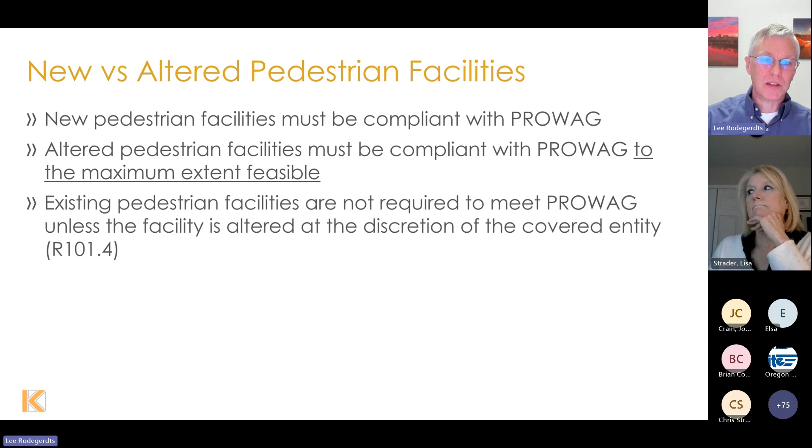What constitutes an alteration? Any portion of the pedestrian facility that's altered must be brought up to PROWAG, regardless of the scope of the alteration. So even, for example, if the main focus of the project was to add a travel lane on the roadway, in doing that, if you alter the pedestrian facilities, then you have to bring the pedestrian facilities up to PROWAG.

So it doesn't really matter if the focus of the project was not specifically to address pedestrian issues. If you alter the pedestrian facilities in the act of doing the alteration, then you would bring it up to PROWAG. That's where it gets a little gray as far as whether things trigger it or not.

It's also worth noting that altering a facility must be connected to an existing pedestrian circulation path by a pedestrian access route—an accessible route to connect the alteration to the actual project. That's something I think Lisa here can talk about as an example.

You're muted, Lisa. Everyone has to do it at least once. I have yard work going on outside somewhere in the neighborhood, so I didn't want to share the blower noise.

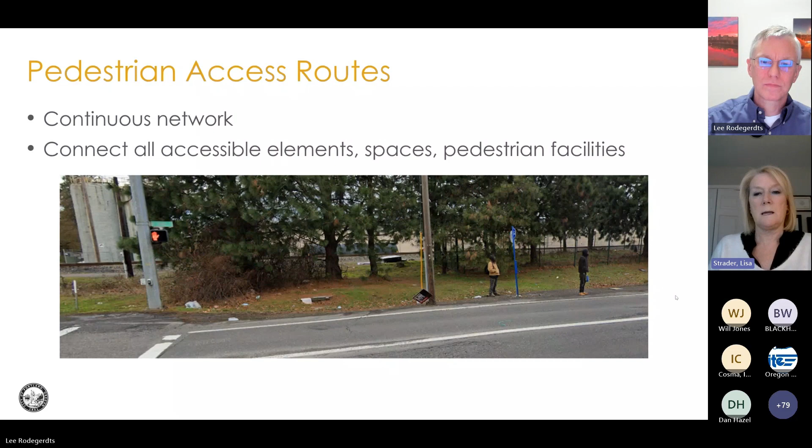So I think this part of PROWAG is going to be really helpful. It doesn't say we have to build a full-on sidewalk all the way down Sandy Boulevard here. It says we've got to have access between those two points, and that alone will make a big difference for people who need that kind of surface to get between spots.

Again, this is where it gets tricky—what constitutes an alteration? This is where PROWAG is actually silent. The draft actually listed some things that would trigger an alteration, but the final rule removed some of those things. So it is silent essentially on what constitutes an alteration, and it's a little bit left up to the interpretation of the agencies involved.

So the way I approach this, if I were asked whether PROWAG is triggered by an alteration—and again, this is nothing official from the Access Board, just my own interpretation—the question I have in mind is: does the change to the facility substantially change the pedestrian's experience? If it does, then you should upgrade the facilities to PROWAG.

Some examples of that—some are pretty obvious. If you close a crossing, for whatever reason, then you should make sure that closure of that crossing is brought up to PROWAG standards.

And this is something we'll talk about in a little bit. It's one of the new items. What if you do leading pedestrian intervals?

Now, I would argue that communicating the leading pedestrian interval needs to be done equitably to everybody, so it's not just merely doing a signal timing change. It needs to be communicated to all pedestrians equally. That's where the APS comes into play, to communicate the start of the walk interval, because it's not at the same time as the start of motor vehicle travel. And so that's where the cues are different, and that's where the APS provides information that would otherwise not be given to somebody who is blind or has low vision, where they would normally hear the sound of the vehicles next to them starting and recognize that as being the start of the walk interval.

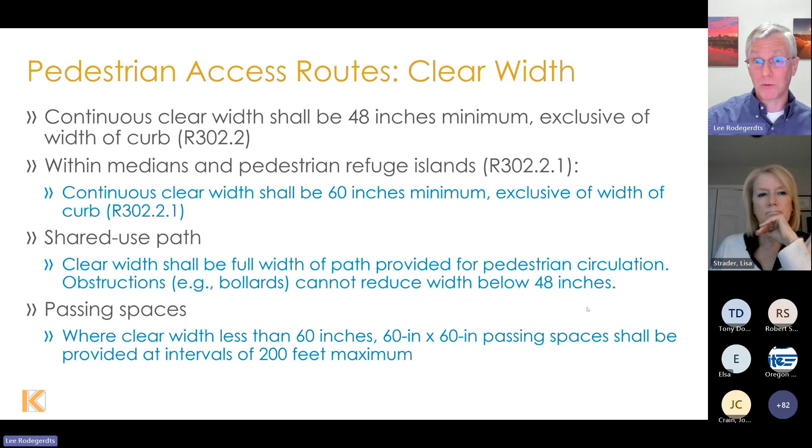Lee, this is Lisa. There's a question in the chat, and we didn't really talk about whether we wanted to take those live or wait. You want me to read it to you? Yeah, feel free, I can't read the chat. Yeah, I know it's hard sometimes. So this is - you mentioned adding bike lanes - is a road diet going to require PROWAG? And I'm not sure whether that whole question got typed or not.

So yeah, Peter, if you want to. I would argue that if you're changing the pedestrian experience, then you should bring it up to PROWAG standards. So again, if part of the road diet is altering the pedestrian facilities, if part of the reason for the road diet is to be able to widen the pedestrian facilities or add buffers or other things between the pedestrians and bicyclists or things like that, in my opinion, I think that would trigger PROWAG. I don't know if you have an additional take on that.

No, this is Lisa. I actually hadn't thought that one through yet. So I would like to think that it does. I would like to think that whenever we can, we lean into this new guidance that was specifically designed and developed by and for people with disabilities. I think that's going to make it a much more universally usable transportation system. But I think for at least for PBOT, that's probably a question yet to be answered.

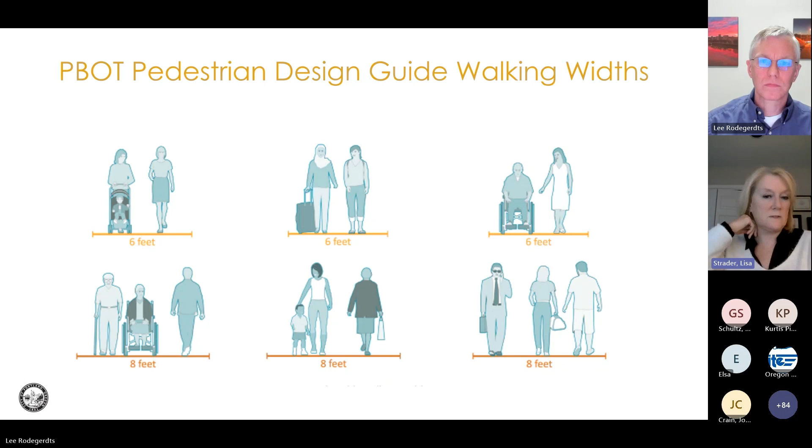From our PED design guide, we provide specific width guidance related to the different street design classifications. In every case, we exceed what PROWAG is requiring now.

Question in the chat: how does the 48-inch minimum width PAR apply to obstructions like utility and signal poles? I'm not sure we covered obstructions in our presentation, and off the top of my head I don't know what PROWAG says about those. I don't want to misspeak about whether 48 is the absolute minimum or if you can drop to 36 for an obstruction—I don't know that for a fact, so I'd have to look that one up.

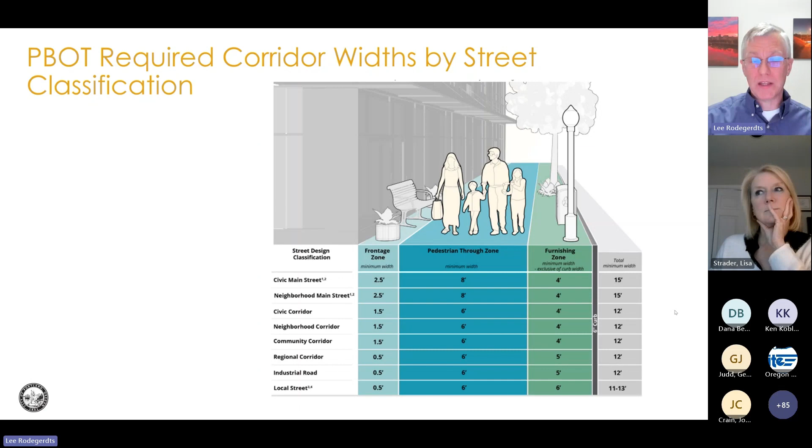Within the pedestrian access route's grades, in the direction of pedestrian travel, there's basically a maximum grade. However, if the street itself is steep, the pedestrian access route can share the grade of the street—you do not have to flatten the street itself. If the entire street is on an 8% grade, that's acceptable, because that's one of those practical limitations PROWAG recognizes. Otherwise, 5% is the maximum grade.

Within crosswalks, it's similar: you can match the street grade, but you can't make it steeper. If the street grades are steeper than that, you can match them. Similarly, if the street is super elevated—more of a state highway issue than local streets—at a super elevation greater than 5%, you can match the super elevation if that's the grade in the direction of pedestrian travel.

The cross slope, perpendicular to the direction of travel, is really critical for people in wheelchairs. This is the rationale behind why cross slopes are so important: so a person in a wheelchair can maintain their alignment through the crossing. If the cross slope is too steep, it will pull them in the direction of the cross slope. That's why there's a 2.1% maximum, which is mathematically close to, but not exactly, a 1:48 slope. PROWAG actually clarified that to allow for construction tolerance—2.1% if measured that way, as opposed to the exact number of 2.08.

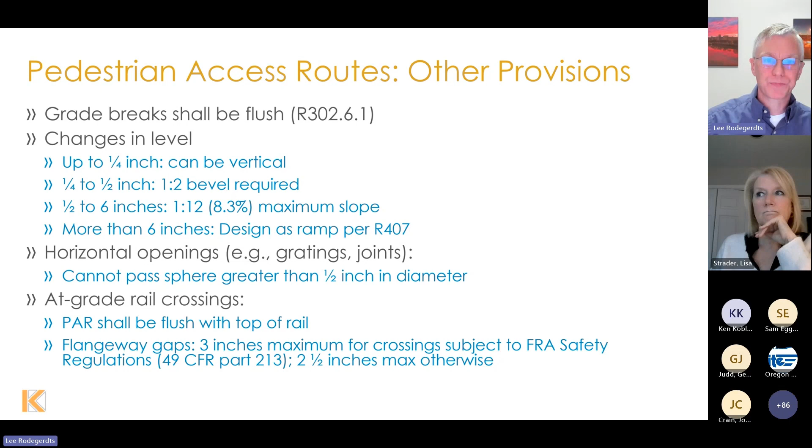Thank you again, Lee. So as it relates to sidewalks and pedestrian access routes, just pointing out that the city of Portland, like many jurisdictions, has a city code that puts those responsibilities on abutting land owners, abutting property owners.

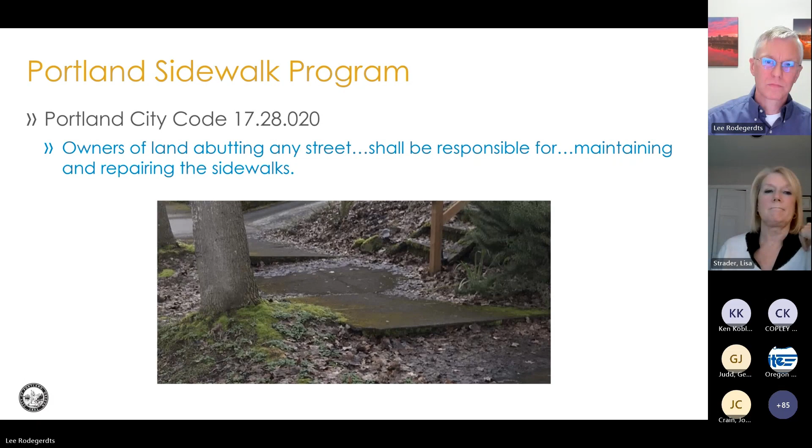As it relates to PROWAG and any measurements that change what makes a sidewalk compliant, I'm sure we will look at changing how we evaluate sidewalks we have reports on related to PROWAG, and likely have those be the ones out of compliance. Again, we haven't had that conversation throughout the Bureau—we've just started our conversations on that, but I'd guess that's how we will include it in our sidewalk enforcement program. Thanks.

Now I want to talk a little bit about alternate pedestrian access routes. So these would be those in construction zones. Basically, if the existing route is accessible, you have to maintain the route during construction.

What's new here is that not only do you have to sign it to meet the visual requirements within PROWAG, but there also needs to be an audible component. This is new in the final rule and wasn't part of the draft. You need to communicate verbally so someone can get this information if they cannot read the sign themselves.

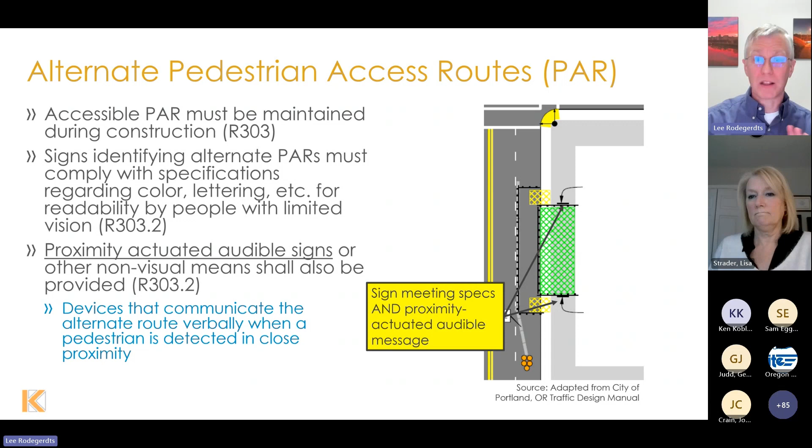So if somebody is blind, they need to be able to get the same information that the sign is providing. That's a new provision that we'll talk about a little bit later, the practical implications of that.

Similarly, the route has to have the 48 inches. I touched on some of these already. You'd still need passing areas every 200 feet, just like a normal pedestrian access route. Where you cross a curb, you need to provide a curb ramp or a blended transition that meets those requirements.

Channelizing devices need continuous detectable edging so you can pick it up by cane, not just at shoulder or waist level or 36 inches high. You have to be able to pick it up at a lower level as well. And if pedestrian signals are part of the temporary route, they need to also be accessible - accessible pedestrian signals, or APSs.

A lot of these things are already part of many design practices, because many of these components were in the draft. That said, there may still be some nuances in the new rule that affect our construction traffic control practices.

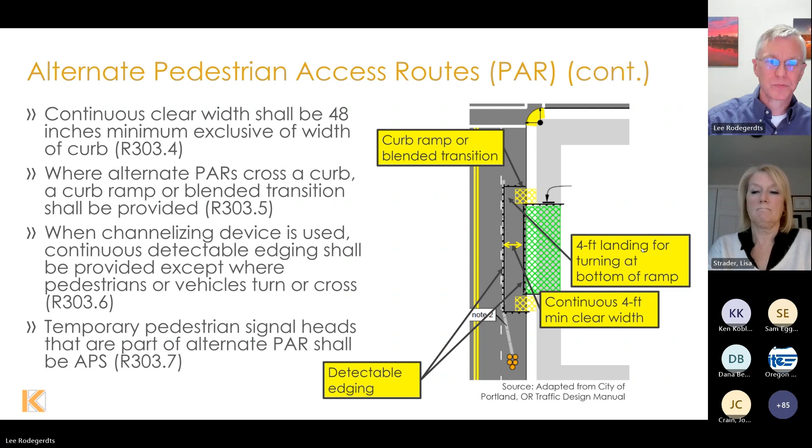Again, this isn't specifically how the city of Portland is going to adopt or address the PROWAG changes to temporary pedestrian access routes, but an opportunity to talk about what I hear from people who cannot get around when we interrupt what used to be there, whether it's for a road project or other building projects.

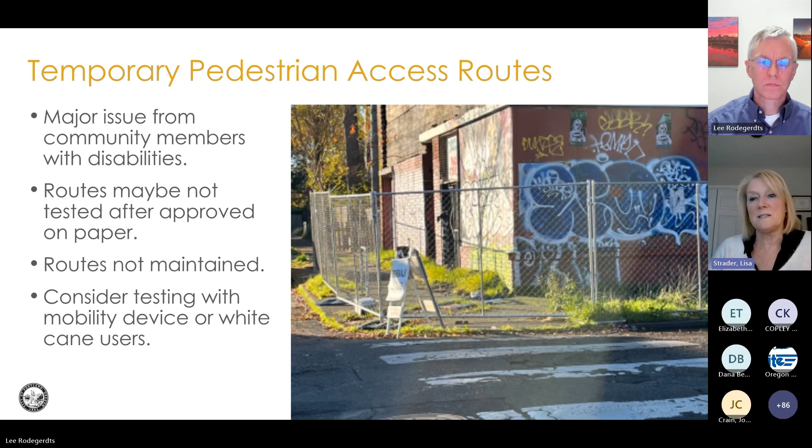If they're not properly installed, maintained, or moved when needed - a lot of projects, especially road projects, have phases. Getting phase 1 right, if you don't adjust for phases 2 and 3, isn't really helpful long-term for people who need to get around while we do our work. So thanks.

Let's talk about curb ramps. They are required for each pedestrian crossing, and detectable warning surfaces are required at the base of the ramp. Nothing new there. If existing constraints make it infeasible to provide separate curb ramps for each pedestrian crossing, you can use a single curb ramp at the corner, but that's the exception, not the rule.

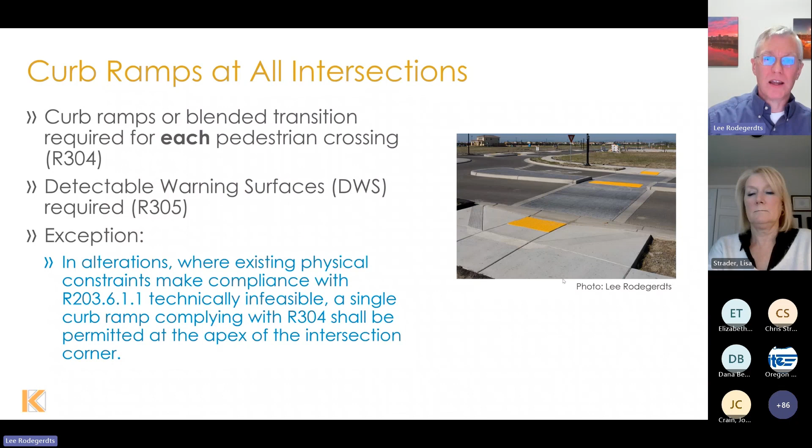We're working toward having individual curb ramps dedicated to each pedestrian crossing, because that works so much better for people who have mobility disabilities or who are blind or have low vision. It's very difficult for a person who is blind to use a single curb ramp on the corner and realize it's serving both pedestrian crossings. That's why it's desirable to have them separated this way.

When you provide ramps, you need to provide a landing area so that someone in a wheeled device can position themselves above the slope, rotate to match the slope, and go down perpendicular to it. This is really critical for people with mobility devices. For example, with a typical perpendicular ramp, you need the landing area behind the ramp, because otherwise the cross slopes become too steep.

That's where those cross slope requirements I mentioned earlier come into play—tops of perpendicular ramps or bottoms of parallel ramps. If you lower the entire ramp because you can't fit a perpendicular ramp, which is very common, then the landing area is assumed at the bottom of the ramp. This ramp here is an older one that doesn't have a landing or detectable warning surface, and we still have plenty of these around our communities.

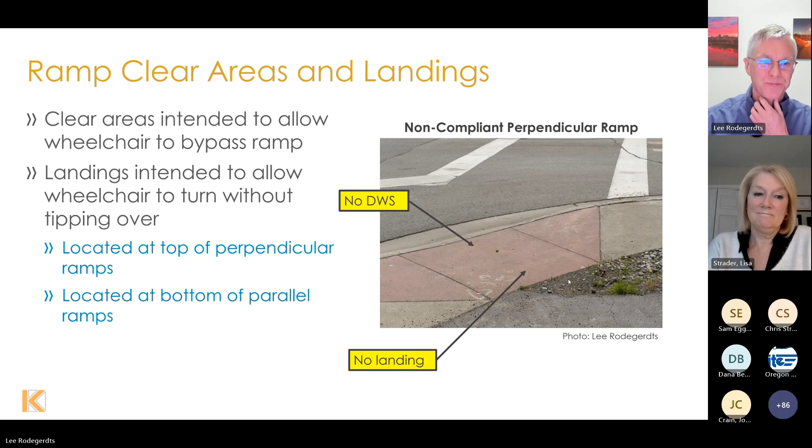These landing areas need to be 4 feet by 4 feet. I kind of think of them as a 4-foot circle, but PROWAG specifies it as a 4 foot by 4 foot square. The cross slope within that square needs to be, again, 1 in 48 or 2.1%.

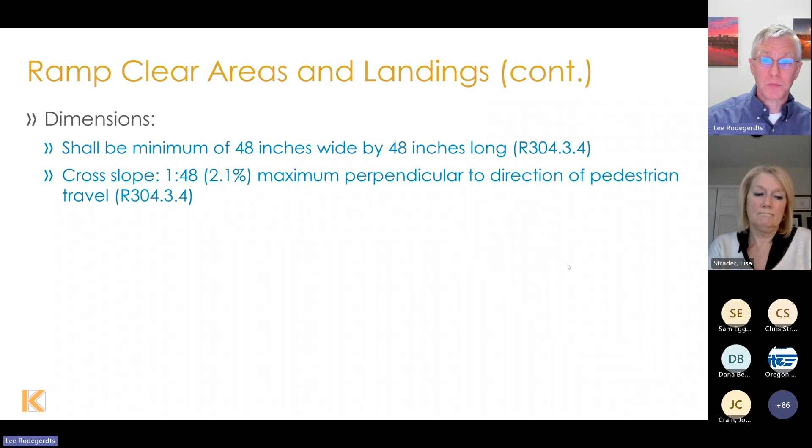Ramp widths need to be 48 inches minimum for a typical curb ramp. If it's shared use, though, they need to match the width of the shared use path. So if you bring in a 10-foot wide shared use path into a curb ramp, you can't put a 48-inch wide curb ramp at the base—it needs to be widened to match the width of the entire shared use path.

That was part of the supplemental draft to PROWAG that came out specific to shared use paths. There's nothing new in this from the draft to the final, but it was part of the supplemental draft that came out a year or two later after the original draft.

What this means, for example, at roundabouts, where it's been fairly common practice up to this point to use shared use paths around the perimeter—and we could talk further about that if we have time—those shared use paths' ramps need to match the width of the shared use path, which requires wider ramps.

This is Lisa again. PBOT is operating under a consent decree, so we have language in that court-approved document that talks about us using the 2010 ADA standards to build curb ramps that meet the requirements of that agreement. This is another one of those places where we have to talk through whether or not PROWAG will supersede that, especially because it doesn't become official guidance for some time.

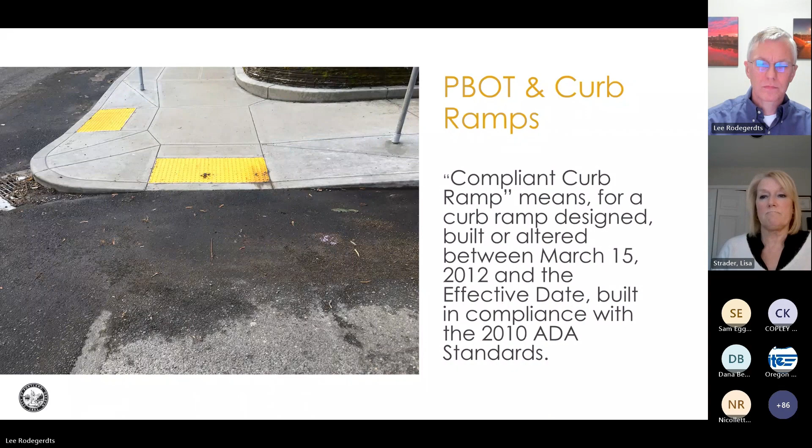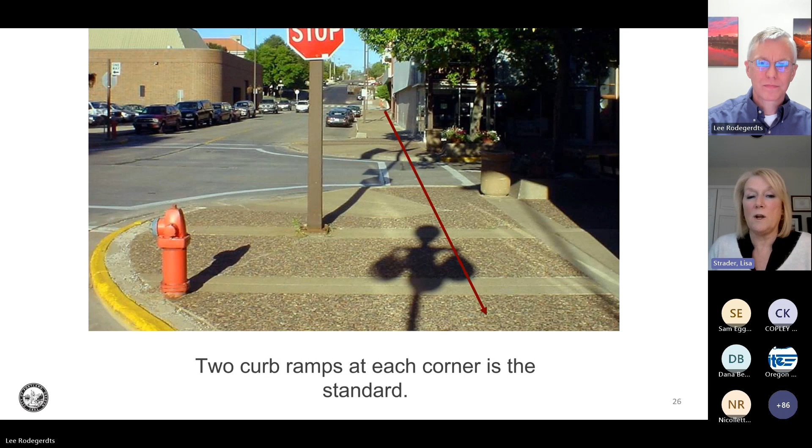I can step down one curb and back up on the other. My friend who's using their wheelchair has to take a different route to head to lunch with me. It's longer, and it puts them into the path of vehicles a lot longer than it puts me. They're likely a lot lower profile than I am, and so maybe less visible.

They're walking with someone in this example, so maybe a driver will notice at least the person walking upright and not miss the fact that there's somebody in their path of travel. But if they were by themselves, or even if it's a dark, gray, rainy day, that puts that person at more risk in vehicle traffic than is necessary—risk that 2 curb ramps would help prevent.

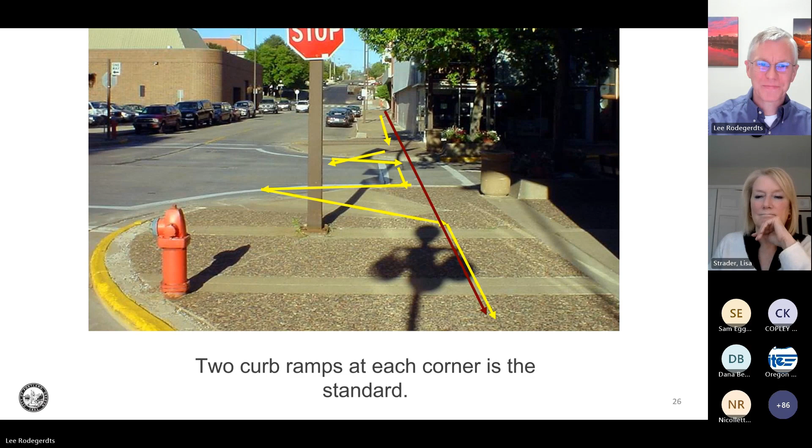To continue on crosswalks, one requirement that's been part of roundabout design for over 20 years now is providing a back buffer between the crossings next to the circulatory roadway. So anywhere at the intersection where pedestrian crossing is not intended or is prohibited, you would provide this buffer.

In PROWAG, it was specified as either landscaping, or what they've added here is this other non-prepared surface. That's undefined within PROWAG right now. The language says they're going to provide further guidance on this in the future, but at the moment it's undefined what a non-prepared surface is.

My interpretation has always been that a non-prepared surface would be something like landscaping or gravel or other loose surfaces, or otherwise not a comfortable walking surface - so a really rough cobblestone. A smooth cobblestone could be a walking surface. Brick certainly is a walking surface. Stamped or painted concrete certainly is a walking surface. Asphalt's a walking surface, so it's clearly not those. It's really something distinctly different from what would be considered a normal walking surface. That's my interpretation, but again, PROWAG is a little undefined right now on what specifically non-prepared means.

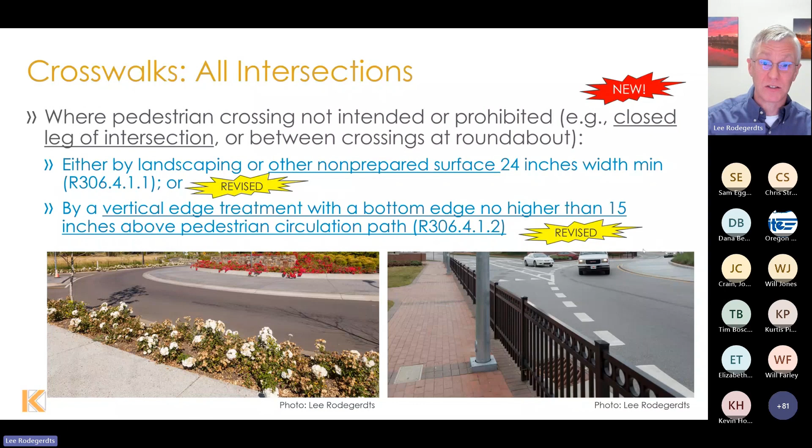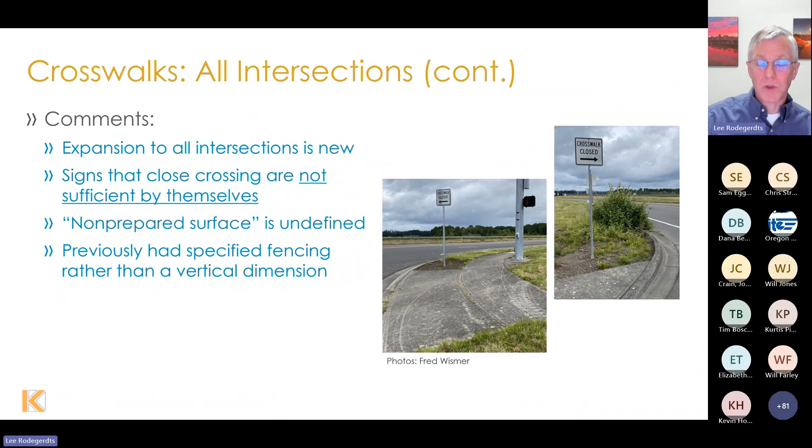So what this means is that simply signing it closed is not sufficient, and that's a really big deal. We have plenty of these kinds of intersections around where we have crosswalks that are closed, so how to communicate that in an accessible way is a really important part.

This is a sign that PBOT actually doesn't use anymore - it's like an upside down coat hanger to close a crossing, and white cane users talk about how easy it is to miss that one pole. We now use something more like a staple with a bar across the bottom that's much more detectable.

But even so, even our new ones aren't what people who are blind or low vision would call fully accessible. It doesn't tell them where to go - it says there's a barrier here, but doesn't give guidance on how to find the accessible route. I don't know that PROWAG specifically identifies that, though some of the language Lee highlighted leans into saying don't just put up a barrier, but give guidance on where the route is. That's something I know people would like designers to be aware of: just telling them they can't cross here might keep them safe, but it doesn't necessarily get them to where they need to go. If they still need to get to the other side of the street, giving them guidance on how they can safely do that needs to be part of how we close an area.

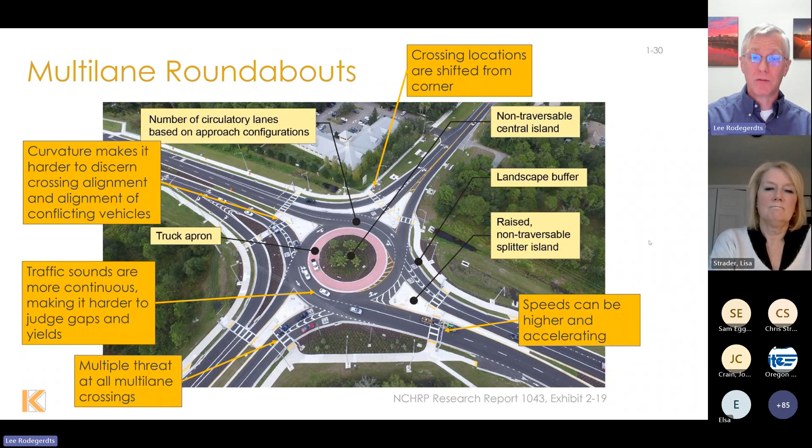Now, all of those things happen at any roundabout. Some single lane roundabouts, this becomes really challenging for people who are blind, but other single lane roundabouts it's fine. But multi-lane roundabouts introduce the next layer of challenge, which is the multiple threat. And that, when combined with the other things, makes a multi-lane roundabout especially difficult for somebody to cross who is blind or has low vision. So that's where a lot of the motivation behind the requirements for multi-lane roundabouts has come about.

With that, the draft specified you have to have a traffic control signal with a pedestrian head, basically a red indication. The final rule expanded this requirement to cover some additional items. So it not only covers a pedestrian signal, but also includes a pedestrian hybrid beacon, or PHB. It includes the rectangular rapid flashing beacon, the RRFB. It also includes a raised crosswalk, or some combination thereof. You could combine, for example, an RRFB and a raised crosswalk, and that would be fine. But it has to be from that list to make the crossing accessible.

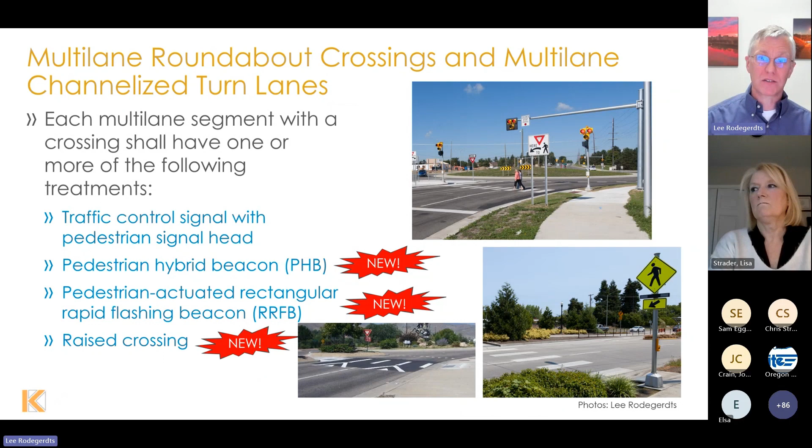The PROWAG is silent on which one to use, and that's something I'll talk about a little bit later. There is research on how to do that selection process. The research first helped to document the problem and expanded the range of solutions. So it's nice to see that the research that's happened over the past decade has informed the final rule, which is very good. It's gratifying to see that.

It's silent on single lane crossings. That doesn't mean all single lane roundabouts are okay. Some single lane roundabouts, just like some single lane channelized right turn lanes, could have accessibility challenges, and the guidance in NCHRP report 834 can be used to help define whether that's going to be a problem or not. So you could make that assessment if you'd like for the single lane roundabout or single lane channelized turn lane. But PROWAG specifically applies only to the multi-lane roundabout crossing and the multi-lane channelized turn lane.

Anything you wanted to add to this information, Lisa? So Lee, with your work with blind and low vision community members, I think you covered everything that I would have said about the challenge that I hear from people, especially blind and low vision community members, with roundabouts. So no, thanks. Okay.

Continuing at the intersection, pedestrian signals, all new and altered pedestrian signal heads need to also have APS, which of course is at the button. The APS has not only the audible communication, but also vibrotactile. So it's providing not only for people who are blind or have low vision, but also who have auditory difficulties. And you can use it for alignment.

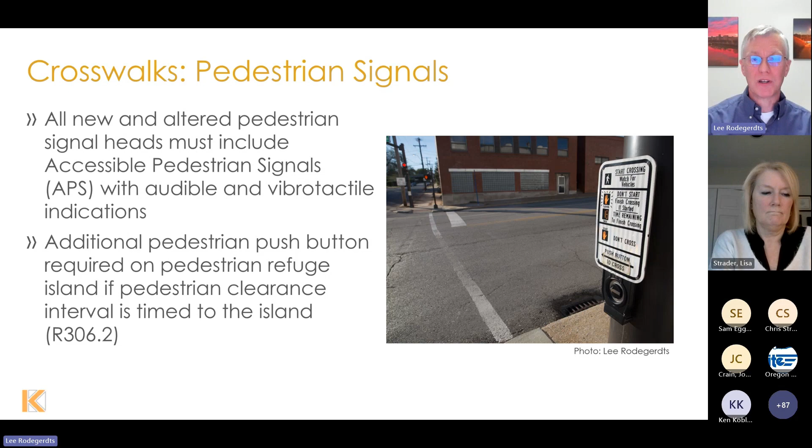So again, that's, and you would require an additional push button if the pedestrian clearance interval to cross the intersection is only designed to get you halfway across. Then you would need an additional accessible push button out there in the median.

A new provision in the final rule—I want to give a hat tip to Peter Koonce at the City of Portland, who pointed this out on the ITE traffic listserv. I started thinking about this and scratching my head, and realized this is a big deal.

When the signal is operating in flashing mode, PROWAG requires that the locator tone remain active and that there's a speech message indicating the signal is in flash. But from a practical standpoint, the way our APSs are currently used, they're taking power from the pedestrian signals and are required to go dark during flashing operations. So there's no power at the APS to communicate with, nor does the APS know which mode the signal is in, because it could be in a planned flash from the controller, or an unplanned flash from the cabinet due to a malfunction.

So these are important technical details that still need to be sorted out. This is where the MUTCD language and PROWAG come into play, and how these will pair together—but it's more than that. It's how our NEMA standards for signal controllers and cabinet standards, how all this actually gets assembled in our controller cabinets to make this provision active.

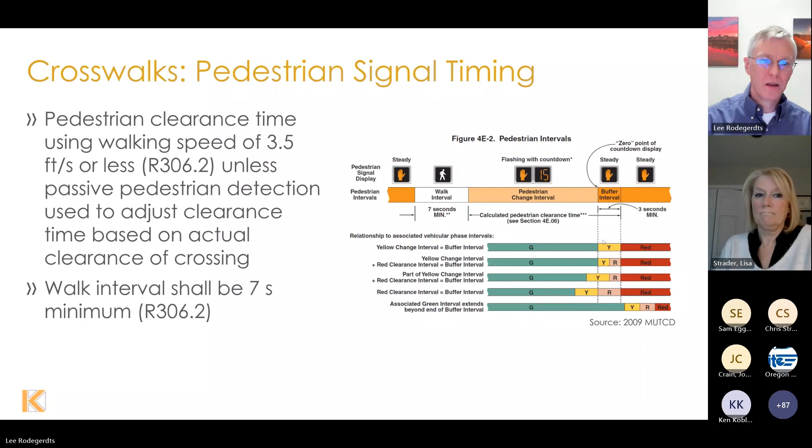I also want to shout out to Peter and his team for my experience with them, and the handoff I do of community members who need longer signal times as an example, and how well the PBOT signal and street lighting staff work with them to make those locations safer—regardless of whether we can make major infrastructure changes or do what PROWAG requires right away. We still do our best to get them around the areas they need to in the safest way possible, with adjustments to what's already there.

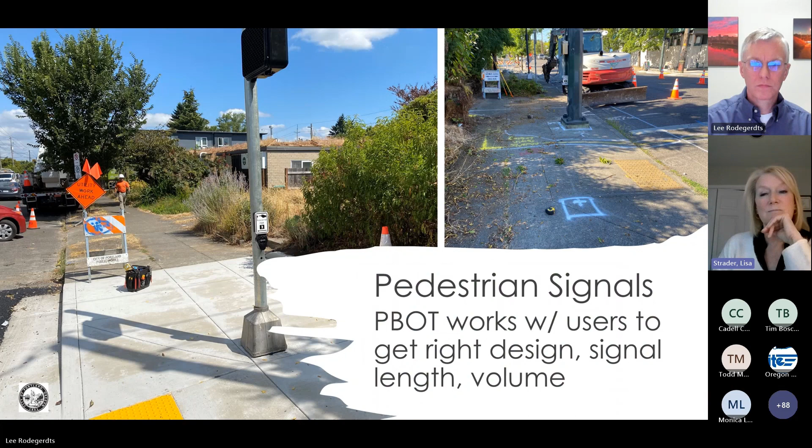Just a little bit about on-street parking. Aside from residential areas, there need to be accessible parking spaces within a block face, and the number you need depends on the total number of designated parking spaces. So I'll share the dimensions briefly, but essentially in commercial areas, or anywhere other than residential, the accessible requirement for parking spaces comes into force.

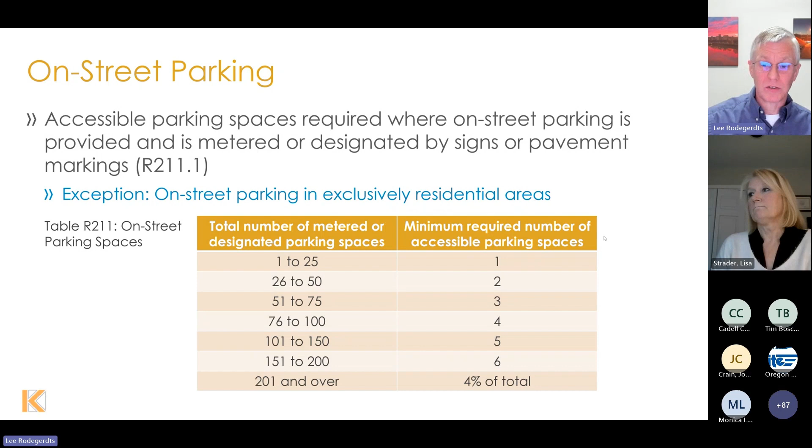Again, when you alter the facility, you don't have to add accessible spaces right off the bat, but if you alter the parking in the area, that's where accessible parking spaces come into play. For example, if you're altering the parking as part of a road diet, you should consider providing accessible parking as replacement, if parking is still going to be allowed on that block face. Or if you're providing a curb extension and remove parking at the corner, you're altering the parking on that block, and you need to bring that block face up to accessible standards.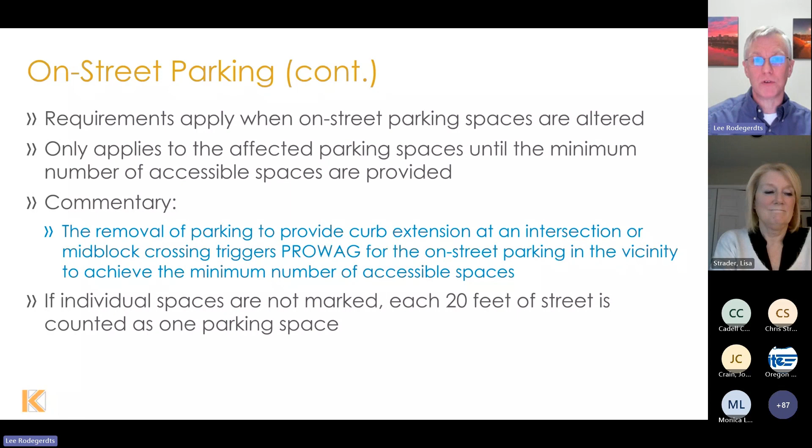Accessible parking spaces—there's a lot in PROWAG regarding dimensions and things like that. I just want to highlight a couple of things. It's useful to think of it as a larger dimension, and that larger dimension is somewhat flexible to allow the driver to position the vehicle wherever they need to allow accessible access. Some vehicles take access from the passenger side, some from the rear, and some from the driver's side, because it is the driver themselves who needs the accessible access.

So that's where these dimensions, it's more of a larger dimension to cover these different scenarios. And then the accessible space needs to have a clear area on the sidewalk next to it, and the middle 50% of that space needs to be clear. That's a real challenge in some of our cases, especially in a retrofit, making sure that you don't have any signs, parking meters, trees, or other obstructions within that middle 50% so that they can extend ramps out from the vehicle.

This is a photo of Hawthorne Street. We had a project there maybe about 2 years ago now, where we took advantage of the fact that we were there to add some accessible parking spaces.

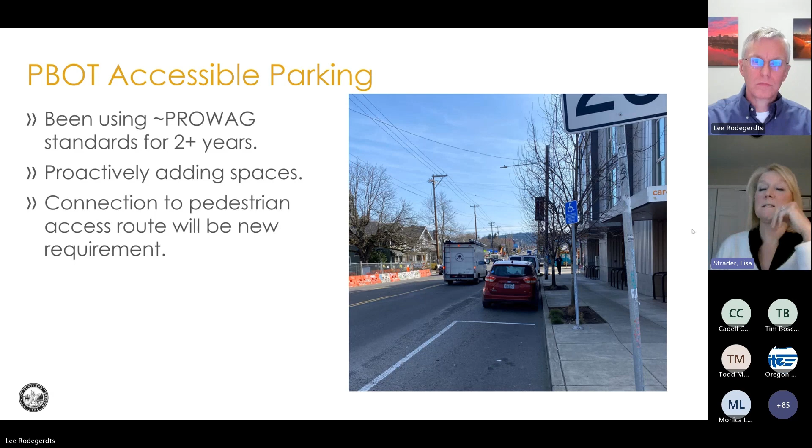So for PBOT, what is going to be different is that we don't have that level landing currently in our guidance about next to the middle 50% of a vehicle. The picture I'm showing you, that's not an issue—we're on a street where the furnishing zone is hardscape—but in a lot of cases we've got landscaped areas where we're going to have to address that. We also try to get accessible parking spaces at corners, but that's not always possible. This isn't back far enough to show you, but this isn't on a corner. I think there's a parking space or two behind this accessible space. So we're still going to have to look at all of those things to provide these in the best way that we can for the people who use them. Thanks.

It's worth pointing out that PROWAG still retains the language that's been part of ADA from the very beginning, which is the equivalent facilitation clause. Alternative designs that result in something substantially equivalent or greater in accessibility and usability are okay. Again, PROWAG provides minimum technical standards—it's not the only way. You can meet it or exceed it, and if there's a different way to meet it or exceed it, that's perfectly okay, as that meets the intent behind equivalent facilitation. Of course, it's up to you to demonstrate that it does meet it or exceed it, and that's where having performance measures and other things can help.

That's where the decision at roundabouts, for example, whether to use a channelized or raised crosswalk, a rectangular rapid flash beacon, or a PHB—there are performance measures developed as part of the research work to help make those decisions. So that's where equivalent facilitation gives you some flexibility. But these minimum technical standards are where the Access Board has kind of drawn a line and said you've got to at least do this much. And it's still a pretty big lift, as you can see from the conversation here.

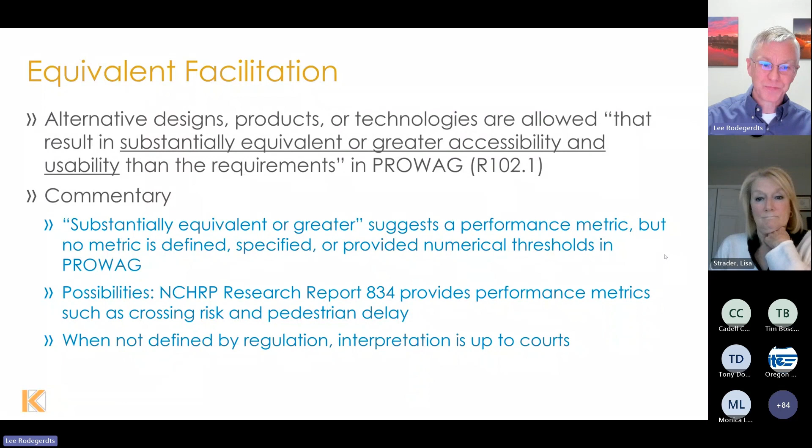So what does this mean for design and implementation? A fair number of these things we've already talked about, so I'm just going to highlight a few in summary. But basically, PROWAG is silent on what constitutes an alteration, so it's going to come down to implementation.

There's a step in the approval process right now. PROWAG has been adopted as final rule by the Access Board, but the next step is that DOT and DOJ, the Departments of Transportation and Justice, have to adopt it. That's what makes it enforceable. And then the agencies can adopt it from that point forward.

Even right now, agencies can adopt the final rule in whatever form, but there's a little bit of discretion right now, and of course the discretionary components will get adjudicated in the courts if it comes to that. So this is a little fuzzy at the moment. It may get clearer as implementation and adoption carries forward over this next year. FHWA is looking at this coming spring to do their adoption process, from what we've learned from them.

APS, again, we've already touched on this a little bit. I would argue that if you're altering the pedestrian experience, then you should be upgrading the pedestrian signals to include APS—that's my interpretation. PROWAG is silent on what exactly triggers APS, so that may come into the implementation and adoption process if specific standards are set. ODOT, for example, could say this is what we're going to require for our facilities, the exact triggers.

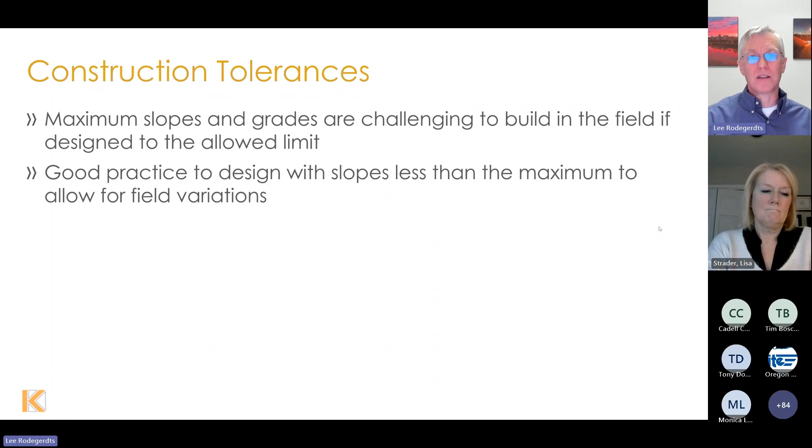But up to this point, PROWAG is silent on that. I think the ramps and slopes are something that—if anybody has had to take out an existing ramp because the slopes don't meet the specs, it can be expensive. So designing things to not be right to the wire, but providing a little buffer in your design so you have tolerance for construction variations, which are inevitable, will reduce the likelihood that you have to come back and redo existing ramps that don't have correct cross slopes or grades. So I'd try to design with a little cushion so you can flex when actually building your projects.

The MUTCD used to be referenced in PROWAG. The provisions that the Access Board wanted from the MUTCD, they put into the final rule itself. So we now do not know what's going to be in the next edition of the MUTCD—it's still pending. We could potentially see it this coming month, we'll have to wait and see. I know the National Committee on Uniform Traffic Control Devices is anxiously awaiting the 11th edition to start reviewing it and seeing what needs to be done going forward. But for now, this will be wait and see.

The Access Board chose not to reference the future MUTCD that doesn't exist yet, but instead took the provisions they wanted. In some cases, like with flashing signals, we have a bit of conflict that will need to be resolved. We'd mentioned flashing APS and audible signs for temporary pedestrian access routes—these, to my knowledge, don't exist today in the commercial market. So the market's going to have to catch up.

So some of these items set the standard we're going to achieve. How this affects implementation is an open question right now, but it's worth raising that it's more than just following the standard—it's some stuff the industry, our vendors, will need to catch up on.

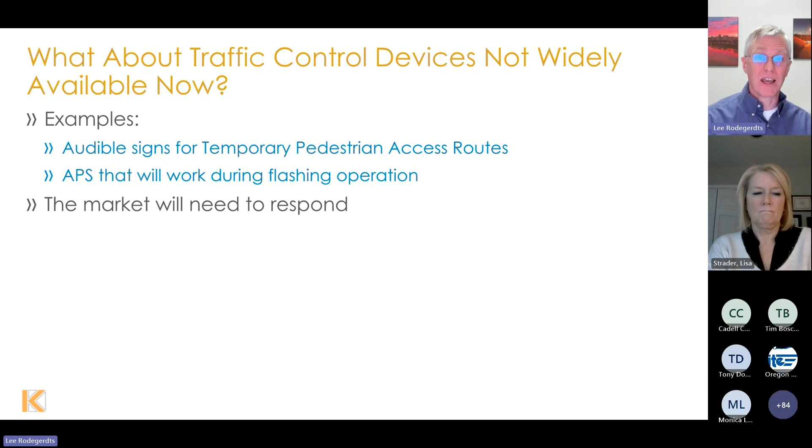What about other tactile warning surfaces? The Access Board continues to specify the use of detectable warning surfaces, but is silent on raised bars, tactile directional indicators, or raised trapezoids—tactile warning delineators—which are starting to see some use now for improving guidance for people who are blind or have low vision, for locating crossings, aligning to cross, and keeping them separated from bicycles at the same grade.

These are the uses of these other devices, but for now PROWAG is silent on that. The Access Board is very interested in these topics—they're looking at them, they're part of ongoing TCRP research related to this—but for now PROWAG is silent on everything except detectable warning surfaces.

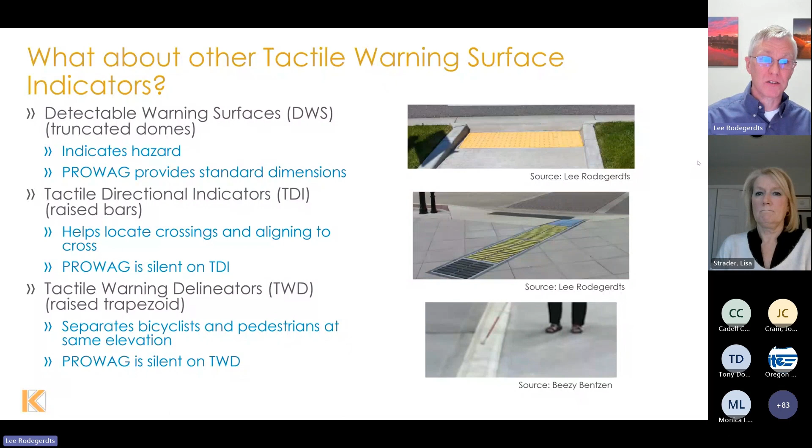So there is some guidance. I mentioned that TCRP report—it's in the final report stage, and the project will be finished by the end of December. So there will be a new report coming out next year on tactile wayfinding for transit applications and for street crossing applications, which will provide additional guidance.

And there's existing research reports to address crossing solutions for roundabouts and channelized turn lanes, report 834, and of course the brand new roundabout guide that came out earlier this year carries that a little further for roundabouts. So there is some basis there to help make those decisions, or to help with that decision process of how to treat crossings at roundabouts.

There's a lot that we know about the assets we're responsible for, but as it relates to their accessible elements, we don't always know that. For instance, on transit stops, we have an overlap of responsibility with TriMet, and we need to decide what to say about whether they're compliant. Similarly with pedestrian signals, we might know how many we have and whether they're audible, but our asset management system didn't track whether there was a level landing, how high the signal was situated, and how close you could get to it. So reach, height, and landing issues.